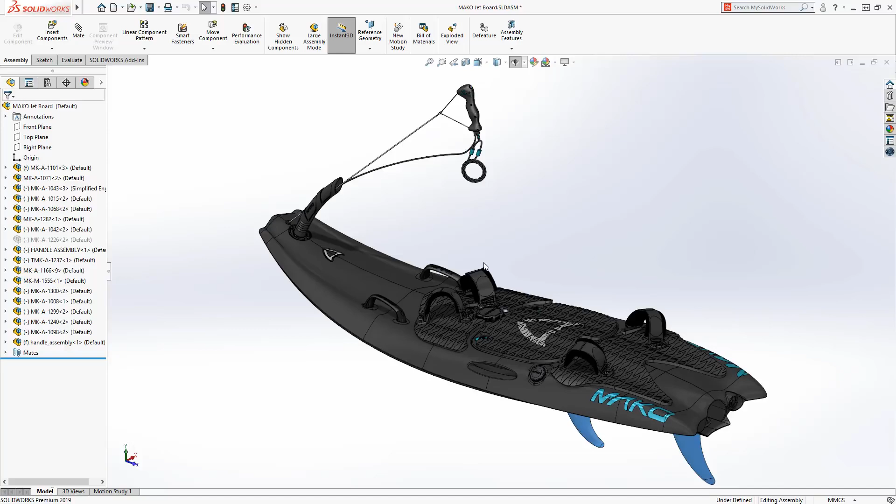Complex shapes are widespread in today's world and are often produced using industrial design tools or carved to make physical models, but they need to be manufactured. A common workflow to complete the engineering process is to leverage these designs from mesh or scanned data. SOLIDWORKS 2019 provides several new tools to help leverage this data to create production parts, and some handy new part modeling tools that are sure to delight.

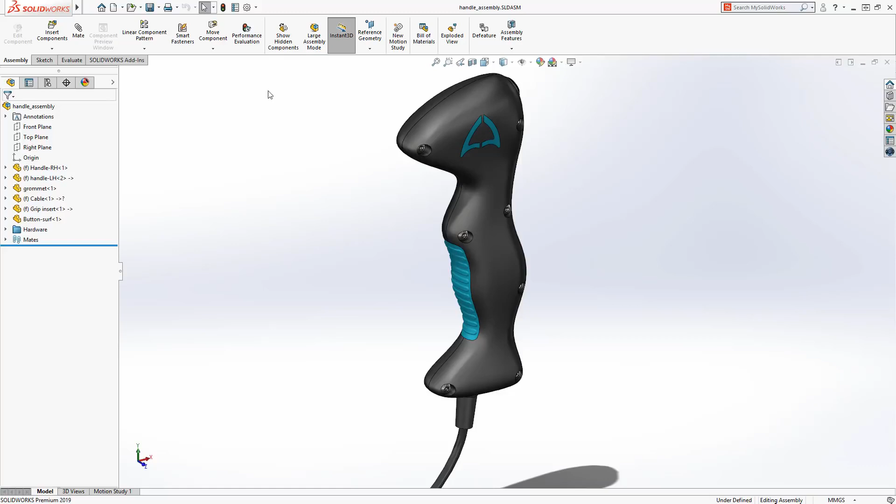This handle originated as mesh data. Let's take a look at how it was built. SOLIDWORKS can open a wide variety of mesh data like this 3MF file. As you can see, this is clearly a mesh body, and to leverage this body to build a solid model, a new slicing tool is available to create intersection sketches through the mesh body.

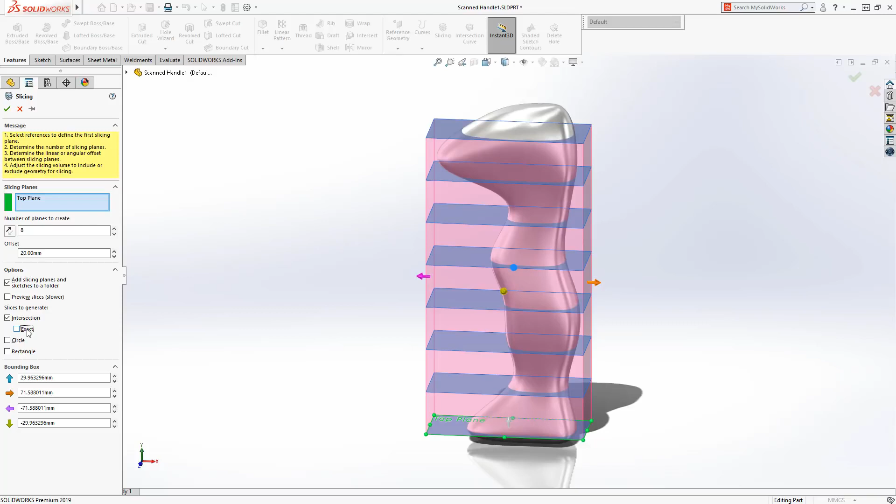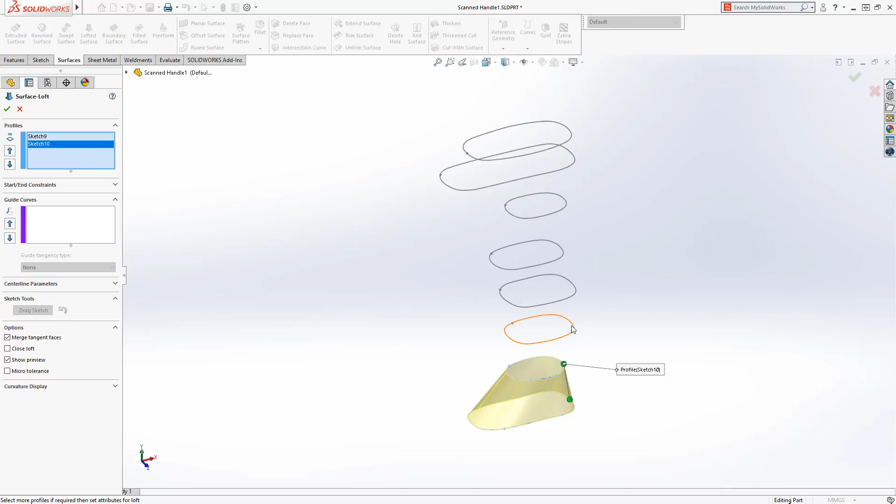Pick a starting plane, then define the number of planes and offset. The slicing planes and sketches are organized in a folder and can be edited to position the sketches in the desired locations. Once positioned to your liking, the mesh body can be hidden. These sketches can be used like any other sketch to create a solid body. For this example, a surface loft will be created to define the shape of the handle. The new slicing tool allows users to easily repurpose mesh data to create solid models.

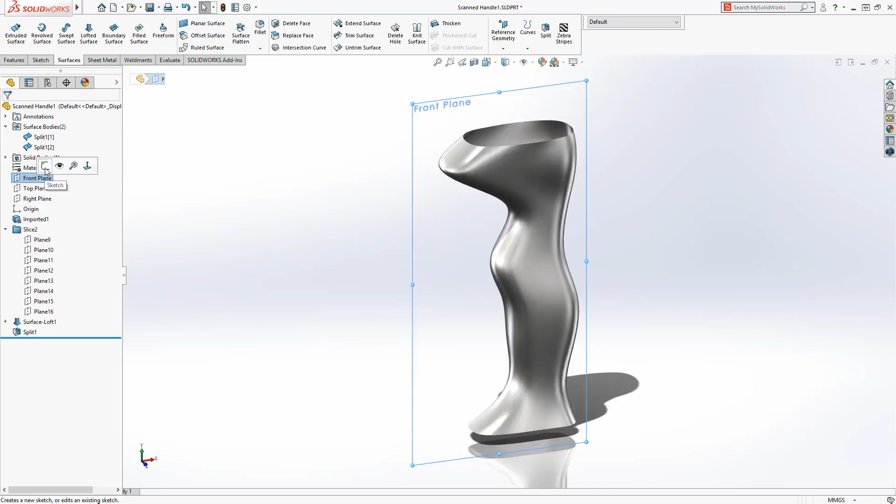This handle will be designed into two halves, so to continue the design workflow, the split command can be used to create two bodies split at the central plane. A logo needs to be applied on each of the halves, so a sketch will be created and a sketch block will be applied and positioned from the design library. To apply the logo, we'll use the projected curve command.

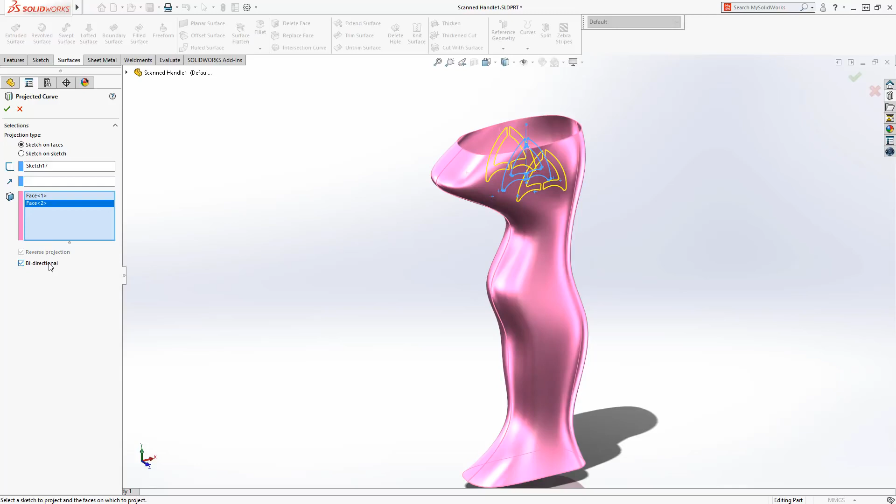In SOLIDWORKS 2019, projected curves now support multiple open or closed contours, can be projected onto multiple bodies, and a new bidirectional option is available to project in both directions. The logo is then created in a single feature. Previously, this would have taken 2 sketches and 4 projected curves.

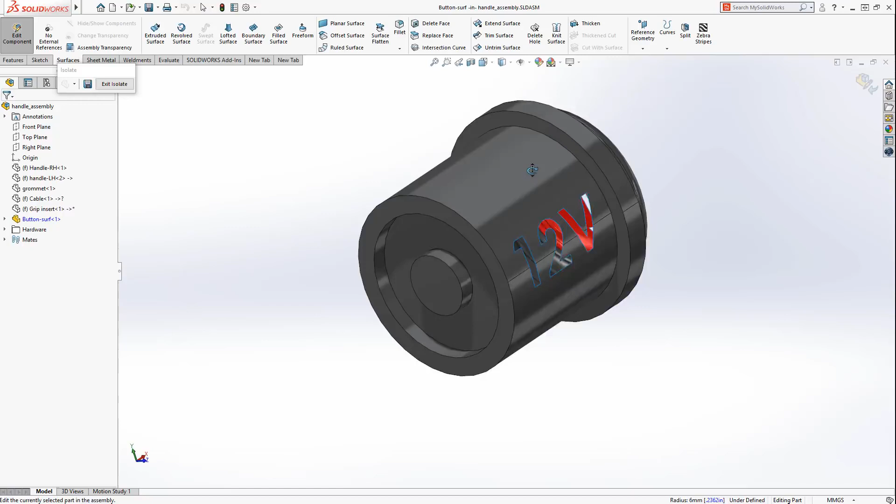As the design progresses, let's take a look at another enhancement for working with surfaces. The power button is a surface model that contains several holes that need to be removed. Previously, these holes could be removed by selecting the edges of the hole and hitting the delete key, but this method was not easily discoverable. Now in SOLIDWORKS 2019, a delete hole button is available, as well as a property manager for editing. The holes are removed and the surface is now watertight.

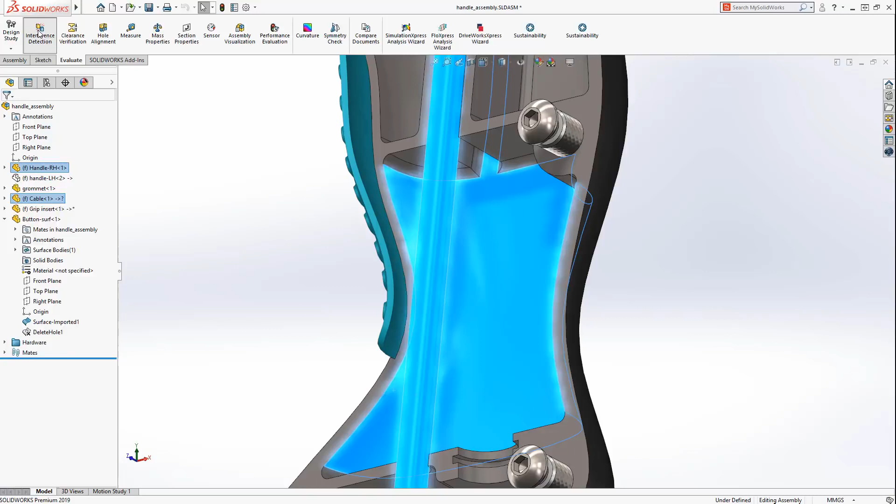As we look over the assembly, an interference is suspected between the cable and the handle part. A quick interference detection confirms our suspicion. To address this interference, the new partial chamfer tool in SOLIDWORKS 2019 will be used. Now, the length of fillets and chamfers can be controlled. There are various options available to control the start and end offset, or the on-screen handles can be dragged to locate the ends of the chamfer. Asymmetric fillets and chamfers are supported as well. This new capability will save time and will reduce the number of features.

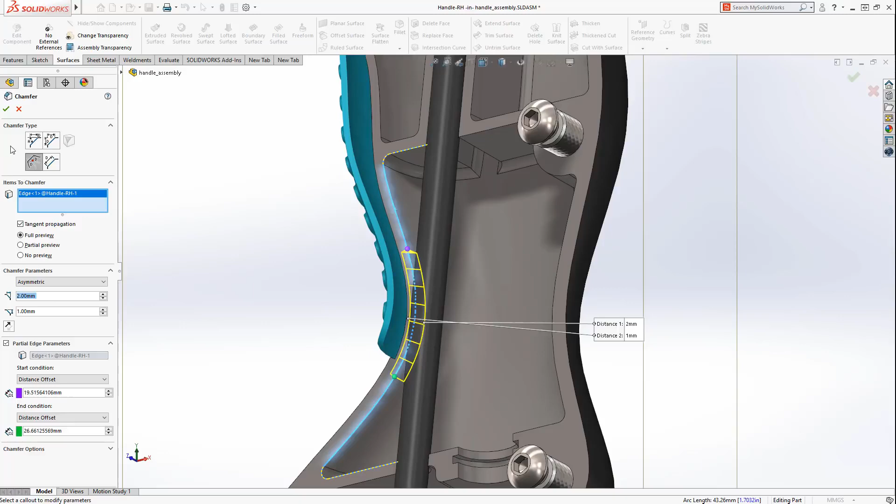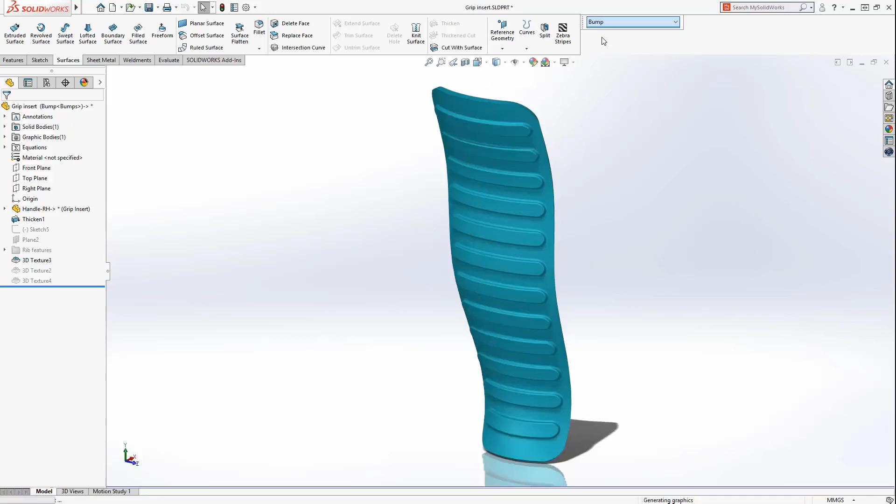Some designs, such as this grip, require textures or bumps which can be functional or just for aesthetic purposes. These textures can be time-consuming to model and require many features, such as these ribs. SOLIDWORKS 2019 introduces a new 3D texture tool which leverages an image to define a pattern of bumps. Here, several variations have been created using this new tool, including a logo.

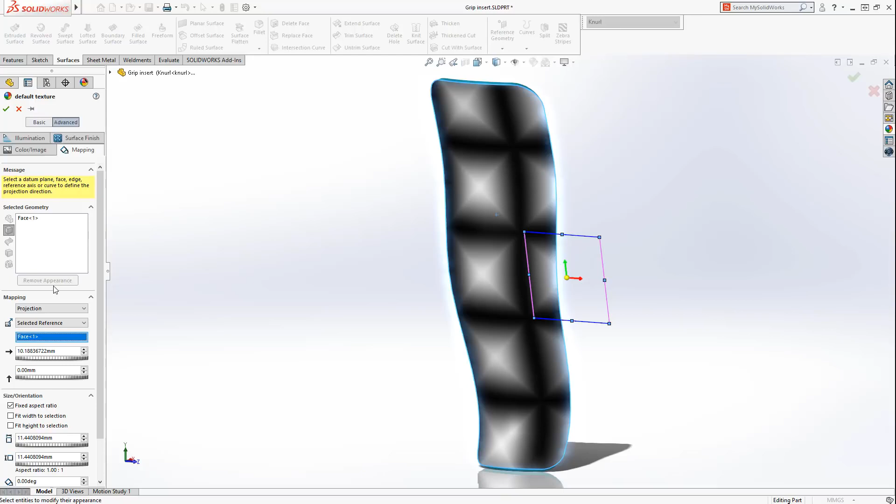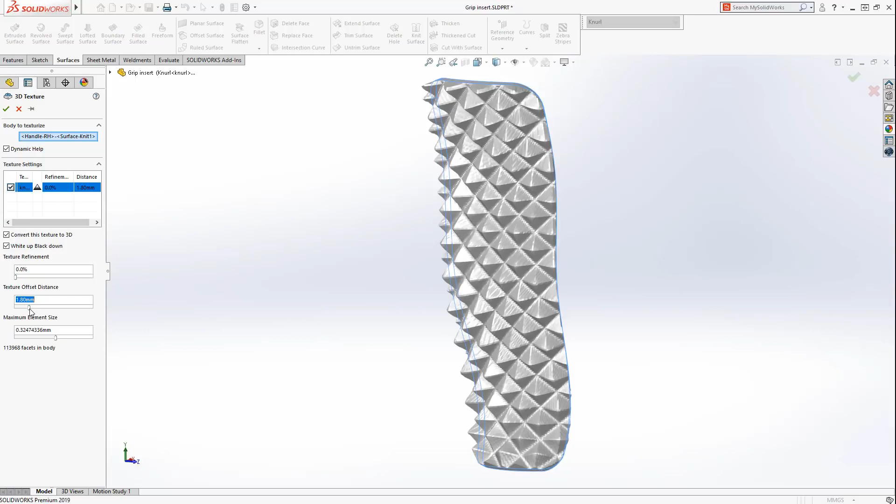These 3D textures are created by applying an appearance to a part or face, then sizing and orienting it as required. The new 3D texture command can be used to turn that appearance into 3D geometry. The lighter the color in the appearance, the farther the offset from the base face, and there are controls for mesh size and offset. SOLIDWORKS then creates a mesh body that is ready for downstream processing or 3D printing.

These are just a few of the enhancements for SOLIDWORKS 2019. These new tools will help to streamline the workflow when working with mesh data and save steps when working with part models.